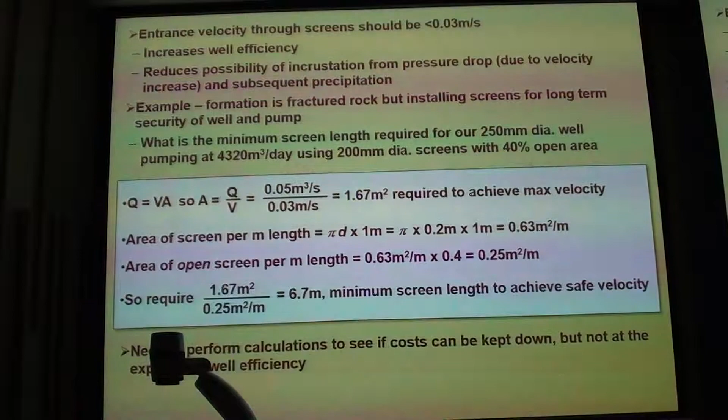Okay, you can check the slot widths. They'll have a specification that goes with them, same as the pipe did before. And you look at the assembly of the thing as well, and you actually watch them put all this together to make sure that it's all done properly, and they don't just show you the bits and then replace them with cheaper nasty bits later on.

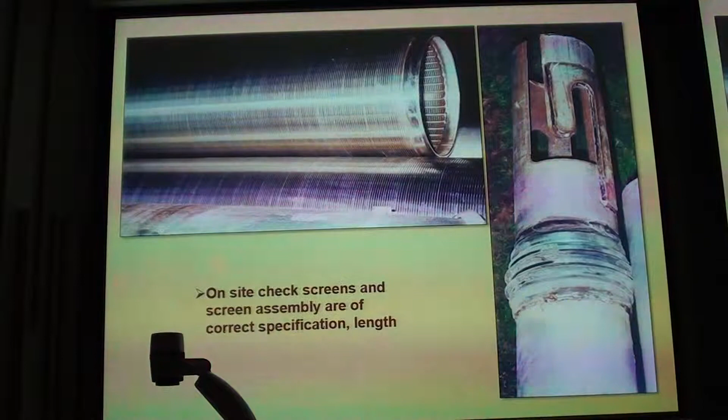You'll do lots of site checks during this part of the investigation. You'll be on site quite a bit. You know, check that things are going along with those that you've stipulated in the contract. Take a shot of that. Okay, construct the well.

Right, we've told them what size casing we want, we've told them what size screens we want, we've given them lengths, we've given them instructions on how to construct it. The pipe will be welded together with fully penetrating welds, full circumference, normally 3 passes, etc. And so now give them the design, and they get materials, and they start. In fact, a lot of the time they'll have materials already because they'll have preempted the fact that this is going to happen. If not, then they'll use them on another job later on.

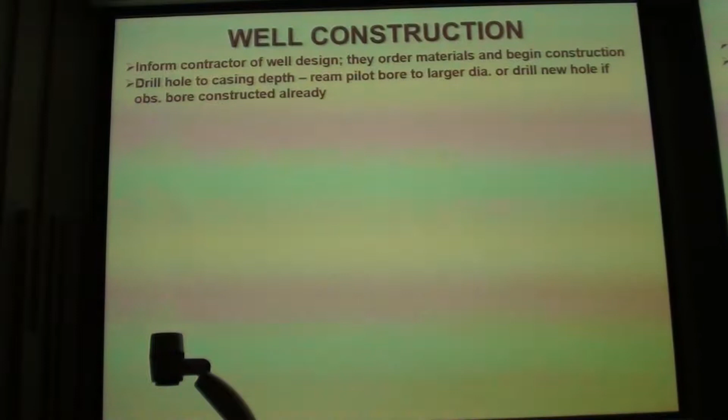So you drill a big hole this time, down to the depth of where you want to put your casing. This time you won't core it, it'll just be a big roller bit, a 300mm diameter roller bit, on the end of a very large drill rig that'll just pummel its way down into the ground, hopefully pretty quickly, and just cleaning up material as you go. You don't need to look at the material that comes out, you already know what's there, you've already drilled the pilot bore. This is just making a big hole straight down into the ground.

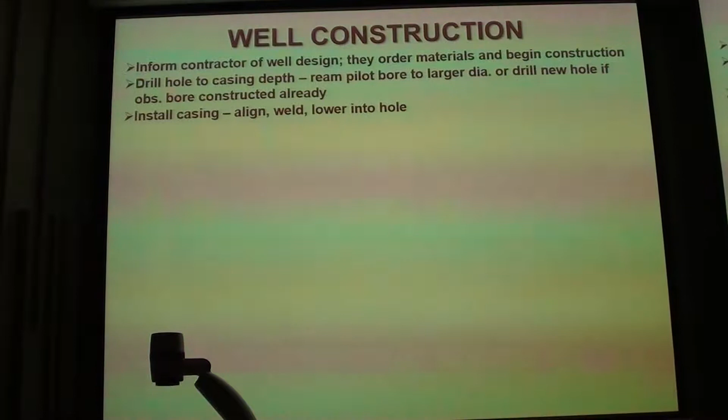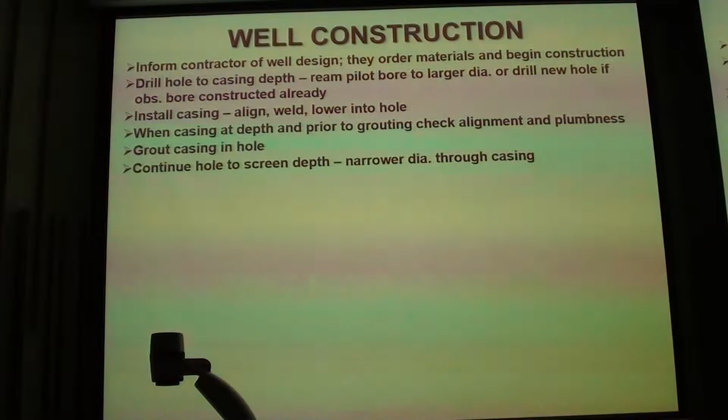You'll install the casing, align it, weld it together, lower it into the hole to the right depth. Check its alignment and its plumbness, make sure it's straight, make sure there's no kinks and bends in it, things that would stop the pump going down. Right, then you'll grout the thing in the hole, cement it in. Continue drilling through the casing, down to the depth you'll put the screens in. And there you put your screens down into the hole, finish everything off.

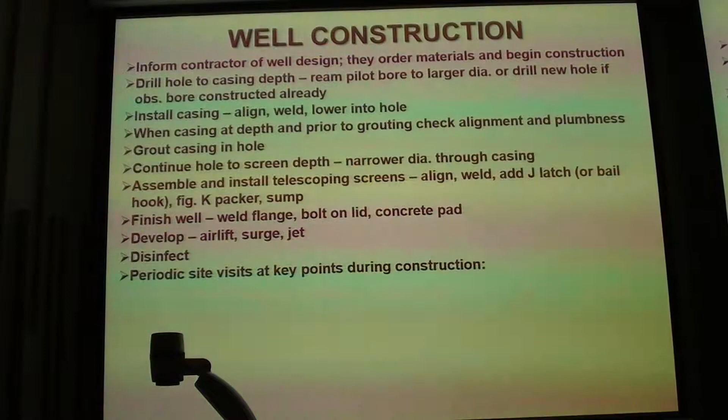Develop it, clean it all out, get all that filter cake off, all that nasty stuff that's been smeared against the aquifer while you've been drilling. You'll pump all that out, hopefully. Disinfect it, and then you'll just leave it until the next stage, which will be the pump testing. That's when a different contractor comes along and puts things in the hole and extracts water through varying means. It gives you data which you then analyse.

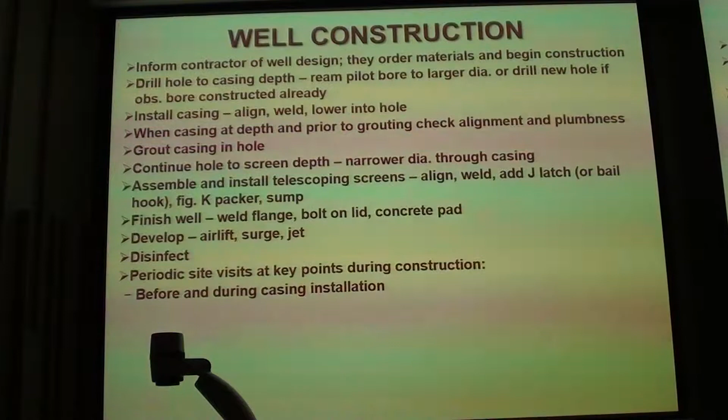But you need to, like I say, visit the site a lot during this particular process. I talked about that in the contract, so there are stop points and hold points and all sorts of other things. Before and during the casing installation, you want to check the casing, but you also want to make sure they're putting it in properly. You want to do things like check the welds, check that they're aligning it correctly, etc. Check it conforms to specification as well.

You also want to observe them grouting it in to make sure they are doing it properly, and the grout fully returns to the surface, so you've got maximum protection between the casing and the ground, and also maximum strength keeping your well open as well. Before and during the screens going in, you'll need to be there as well to make sure everything's all good, and you'll check welds, etc. for that as well. Okay, so there's a lot of practical stuff that goes on here as well, which you have to be present for.

Now, it can be a real pain in the butt. There's one bloody case we had with the drillers. They ordered their casing right on site, and it hadn't been beveled. The manufacturer hadn't beveled the ends of the casing, which I'll talk about in a minute. And so we're already flying down to New Plymouth to go and check on the casing and the installation, because they were going to build the well on the site so we could see it.

And you get phone calls at 8 in the morning saying, oh, it's not going to happen. So you go, fair enough. So you cancel all your bookings and your flights. And then they said, oh, it'll be a couple of days. And then 4 o'clock in the afternoon, they said, we're ready to go. And you go, then, yeah.

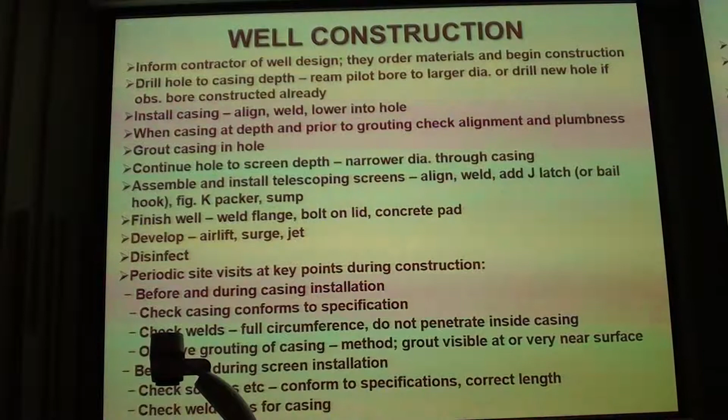And so then you've got to rebook your flights and your accommodation and get to the airport and get down to New Plymouth before everything closes and try and find McDonald's and hop in a rental car and race out to the site which you've never been to before. It's 8 o'clock at night and it's pissing with rain, pitch black in the middle of winter. It's great fun. Everything that can possibly go wrong will go wrong on at least one job. And this was one of the ones that went wrong. They did the job really well, but you've got to give this a little time. Yeah, it's good fun. Just be prepared for those kinds of things.

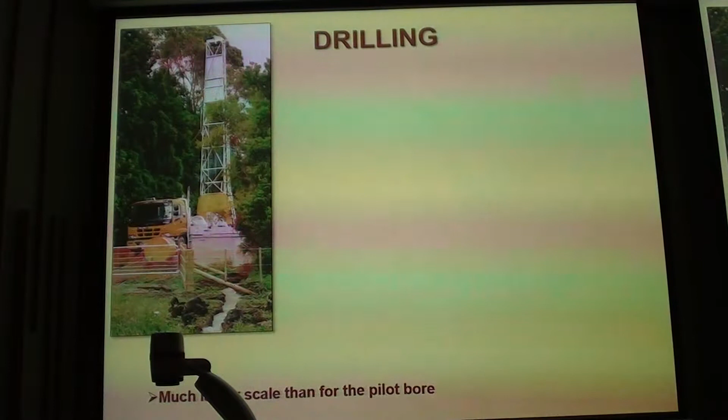Okay, so the drill rig, much bigger than you were using previously. The last one, I think, had about 2-3 metre lengths, so they get about 6 metres of rods above the ground. These things here are like 12 to 18, 20 metres high. They're big trucks, lots of grunt, very noisy, big smelly old diesel things. But they're the ones that you use for putting the big holes into the ground. You can see there's the driller, and there's the length of rods that they're using. All the heavy gear. The heaviness is great because it keeps everything vertical, going straight down into the ground. But you need a lot of power to turn it, a lot of grunt in these things.

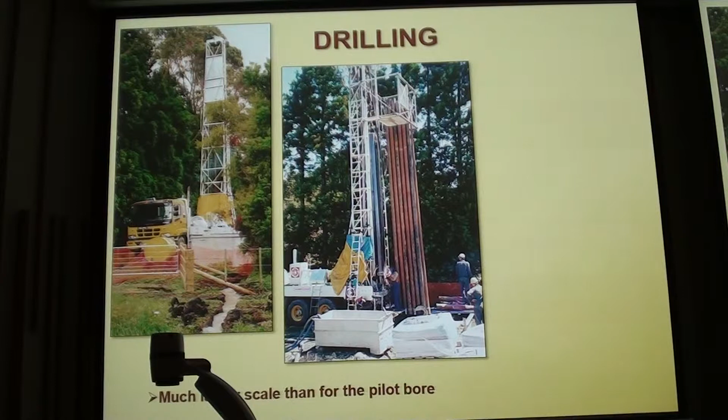Everything when you're building wells is bigger. The mud pits are huge, so everything's big. And it's more than a two-person operation. When drilling the pilot bores, 2 people is enough to run everything. Here you've got 3 or 4. So someone's standing up here feeding the pipe across, you've got the driller and the other workers down the bottom with all the tools and everything grunting away. But it usually goes pretty quick, because these things are pretty grunty. It's all good.

Big mud pits. Okay, don't go near those. They're really slippery. They use really, really slippery stuff. A lot of it nowadays is polymers. It's all man-made, and it's really slippery stuff. You don't have to get much on the bottom of your boots to go for a skate. You don't want to go near those.

All various things here. They'll mix the grout in these things before they pour it down the hole to cement the casing, and some bags of cement, all sorts of things over the place. But again, it should be a tidy workplace. Everything should be contained within boundaries. It should all be fenced off, in fact, for safety. Public aren't allowed to just wander in and have a look around. All those sorts of things that OSH necessitates nowadays.

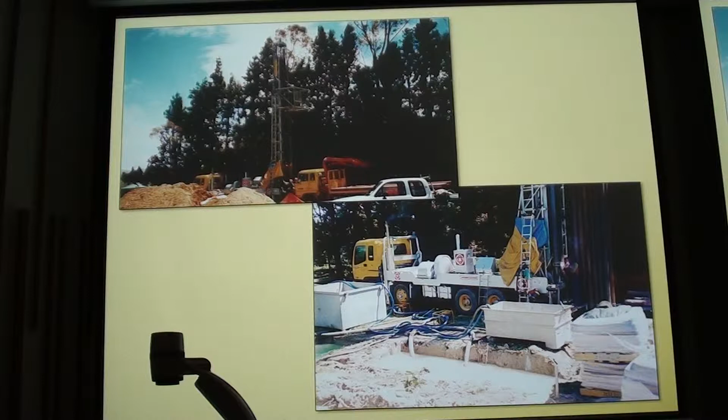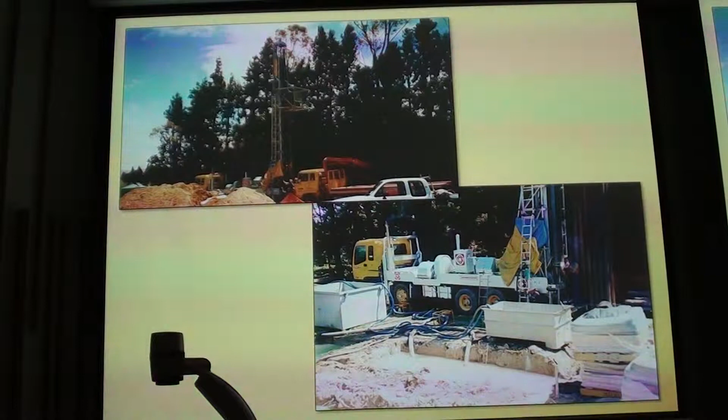You have to wear bloody hard hats and vests and things. Hard hats are actually a waste of time. The only thing they're good for is to stop you banging your head on things. Otherwise, they're not really that useful for much. Anything going a reasonable velocity or a reasonable weight will go through it to crank your head anyway. But you have to wear them.

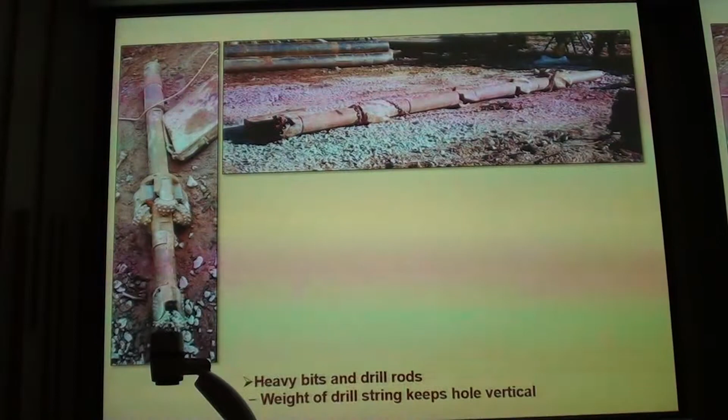So all the gear's big here as well. Big long drill rods, big bits, all the reamers and openers and things at the back. Heavy bits. So you need all that, because A, you've got big diameter holes, and B, they've got to be vertical. They've got to be plumb.

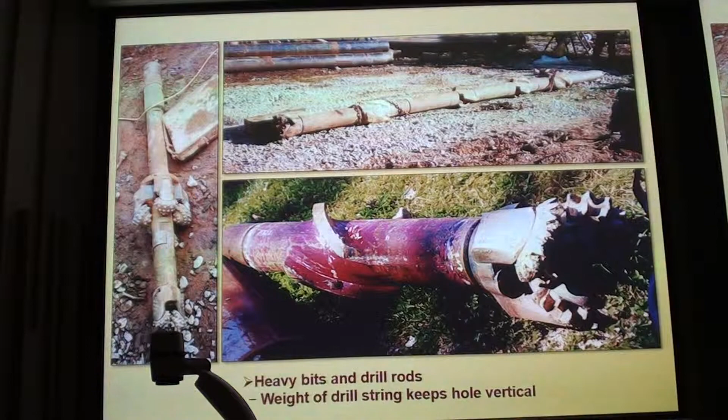As the weight on the drill string keeps that happening, by the time you get down to about 200 metres with all this gear hanging on the end, the drill rig is holding up several tonnes of steel as it goes down into the hole.

So it's why it's so big and grunty, but it's doing its job by keeping everything nice and straight. They should weld, and you've got to align the casing. The casing has to fit together perfectly, edge to edge with no overlap on the inside, so that when you put things down the inside, like the screens and the pump, it doesn't get caught up in the casing, which would be an absolute disaster. So they should weld little alignment tabs onto one end of each piece of casing.

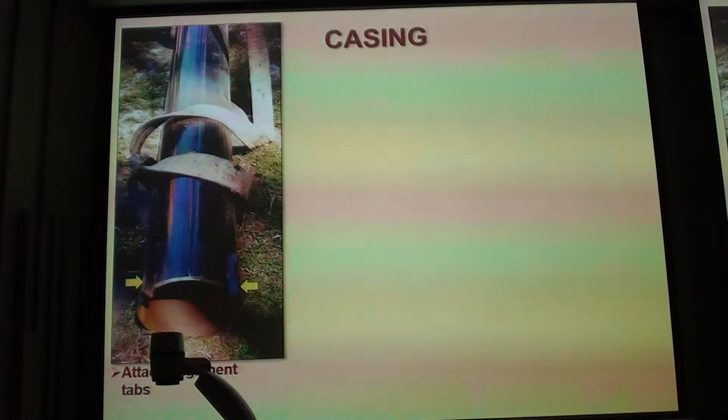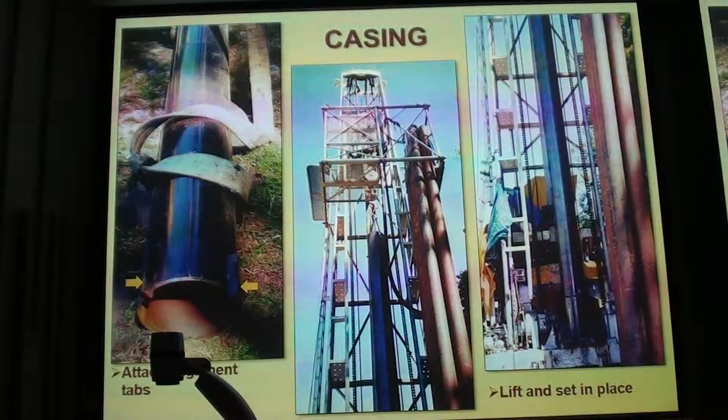Then they'll lift the casing down and set one piece on top of the other. The alignment tabs on the piece they're setting down will fit perfectly over the piece of casing that they're holding up here in the hole in the grips. Then it's just a simple matter of welding it all together.

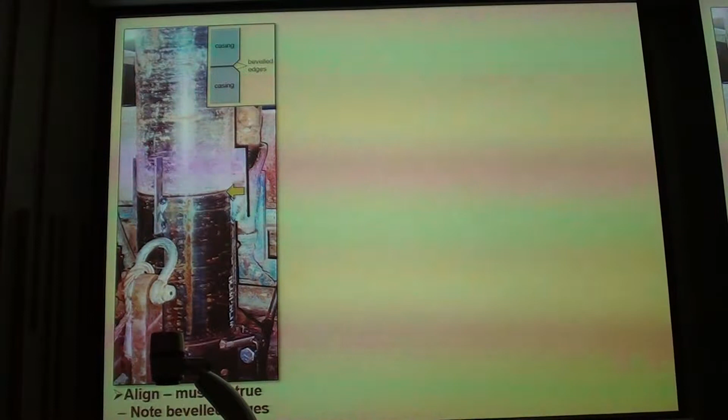When they sit the casing together, see these beveled edges here, they leave a nice recess all the way around. When they've finished welding it up, that should be nicely filled all the way around, so you don't get any leakage, nothing can get in, nothing can get out. The welds must not penetrate inside for the same reason as the casing can't overlap. It's a very simple process, and they'll be very experienced at doing it, but you've still got to check that they're doing it properly. It's very important.

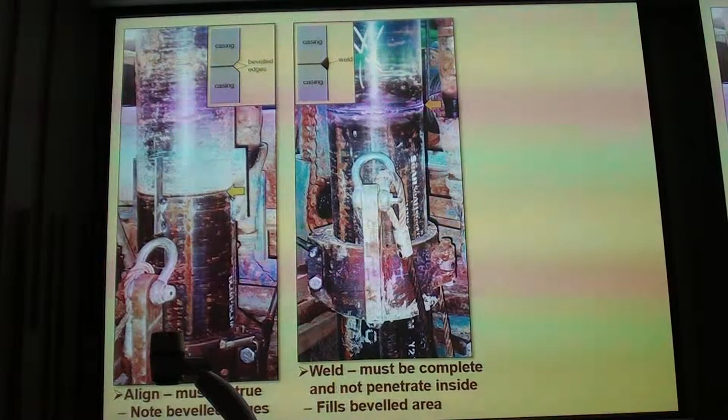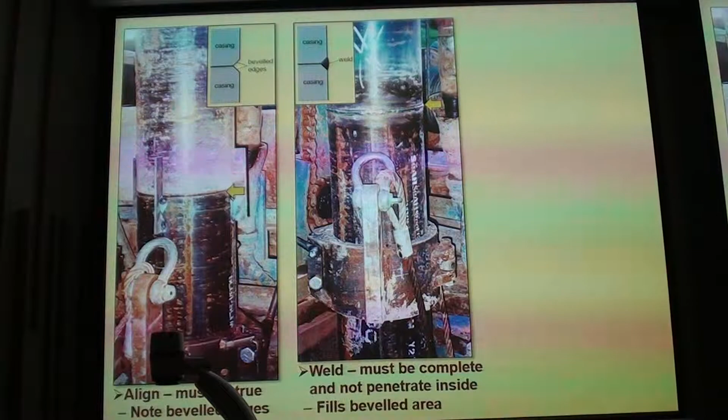Then they lower this one down, knock the tabs off—they just come off with a hammer—lower the next one down, put another one on top, and it's just a process. It actually happens reasonably quickly when you've got an experienced team that knows what they're doing.

Once your casing's sitting on the bottom of the hole, they'll weld a flange onto it there, which you can bolt a cover onto, or do whatever you want to keep the well safe later on. But you'll notice between the casing and the edge of the hole is quite a sizable annulus.

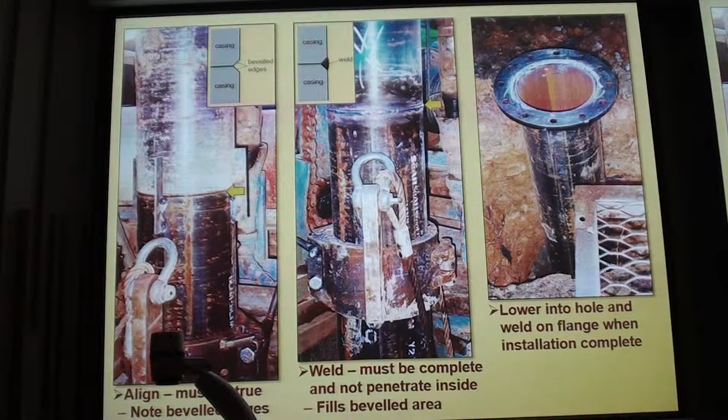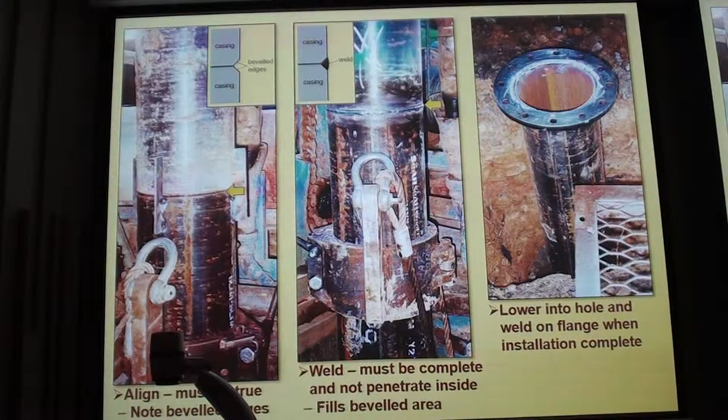They've got to test the plumbness and alignment of the casing to make sure that you can get a pump down there, and get screens down there and in and out.

So they'll make up some sort of dolly, which it depends how they do it, but if you're doing a solid one like this, it's got to be half the length of a casing piece, so it can slide through quite easily. It should go all the way from the top of the hole to the bottom without interference, which means your well is nice and unobstructed.

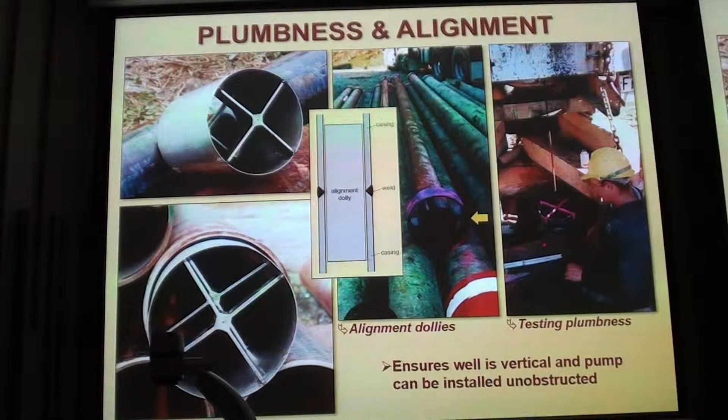What they'll also do is an alignment test as they lower this down, with a little device sitting over the top here, and the cable rests against it. If at any time the well deviates from vertical, the cable will move against here, and you can note that. If it gets excessive, they may have to do something about it. Basically, as long as their dolly goes from the top to the bottom of the well, it should be pretty safe.

It does help if the well is vertical and not tilted at any angle, because when you put a pump down, you want it to hang in the well at depth rather than sliding against the side. So plumbness is very important, as is alignment. They should test that, and again that will be written into the contract—they'll have to give you the methodology as to how they're going to do it, but it'll be written in there.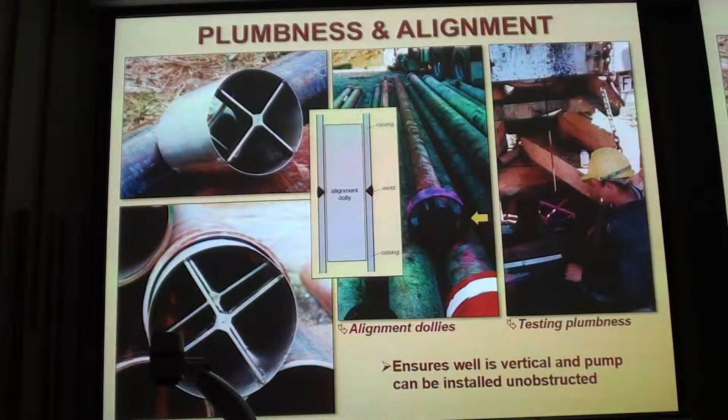Right, grouting the casing in.

They mix the grout on site sometimes. It depends if the site's easy to get to and it's normal work hours—they may actually just chuck in concrete already mixed, already pre-mixed.

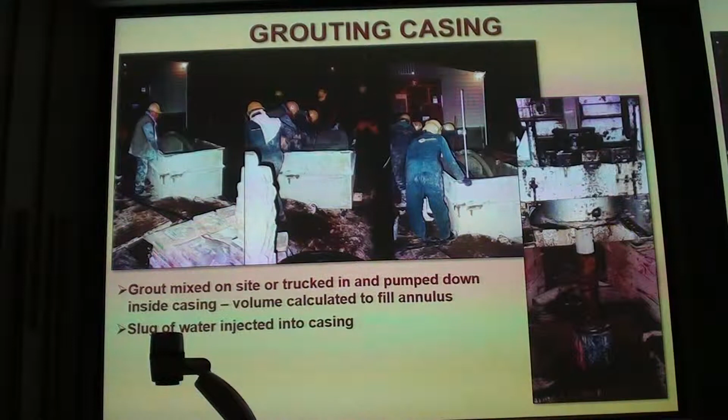Often they'll mix the grout on site. They've calculated the approximate volume they need, they know all about this, the consistency, and what the final grout needs to be like. So they'll mix it on site, with the casing sitting here on the bottom.

They pump the grout down to the bottom of the casing, so the inside of the casing is the grout. That sounds weird, but that's how you do it. Then they chuck water on top and seal it up, then pressurise the water. The water pushes downwards and pushes the grout up and around, up the outside of the casing, and it should come somewhere near the surface by the time they finish.

That's one thing you have to make sure of as well. They can finish the rest off when they do the well head later on. Basically they lift the casing off the bottom, pressurise into part of the casing, and the water pushes the grout down and up the sides, isolating it from the ground if everything's done properly. So you've got a nice annulus around your casing.

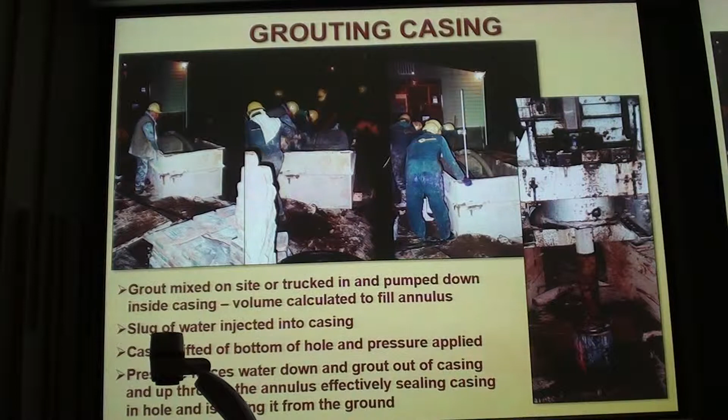Then the screens go in. You've looked at the screens, so you can see we're putting an awful lot of screen into this well. This is the vast amount, this was down on the same Taranaki job as well. This is daylight we've got.

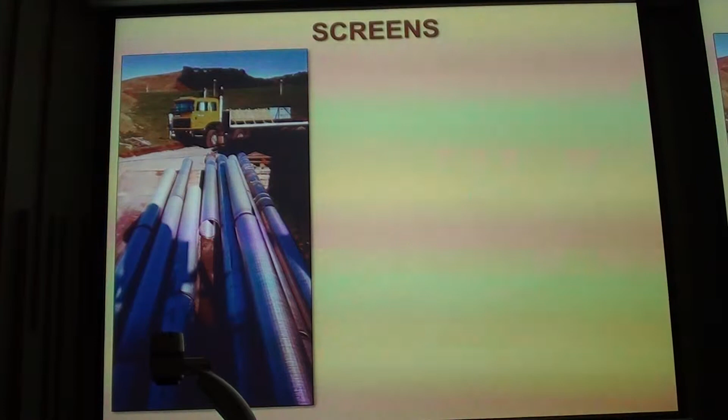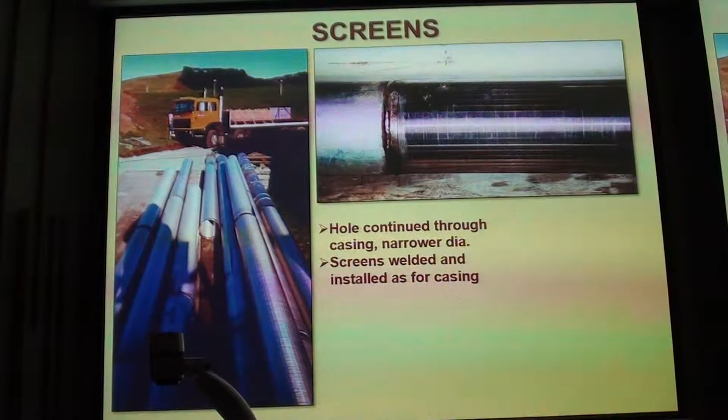Basically you then drill through the middle of your casing, so you lower the drill string down through your casing at a narrow diameter, carry the hole down to the depth you want, weld your screens together, and install various assemblies on it.

You've got this J-latch, which is how they lift the thing up and down. The crossbar goes down, hooks into that, and pulls up and down. You've got this rubber packer here, which will seal the screens against the inside of the casing down at the bottom of the casing, keeping everything integral as we had before.

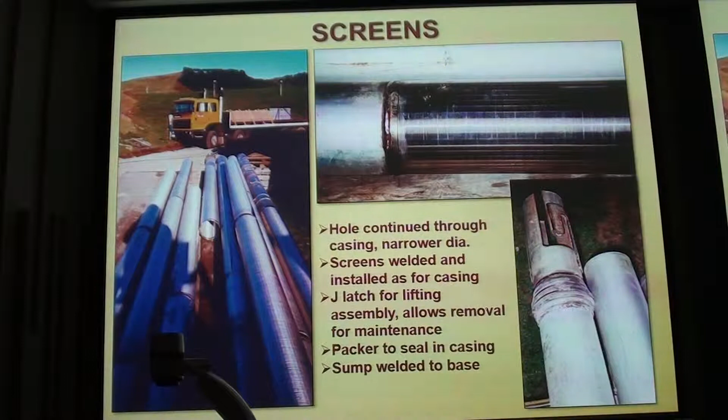And you'll get a sump. They'll weld a sump on at the base, a 1 or 2 metre long hollow tube that will catch anything that falls into the well, hopefully, so it doesn't get up through the pump, and it'll also support the well on the bottom, along with your J-latch and your packer.

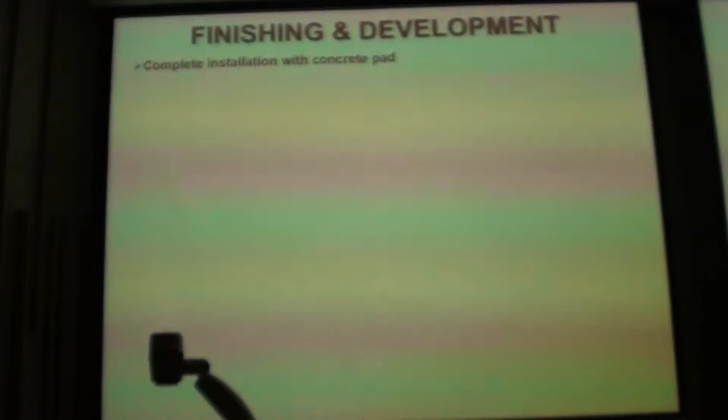Then they'll just finish it off. They'll top up the concrete if they need to, top up the grout, and make a nice concrete pad on the surface, keeping everything nice and tidy.

The well will be developed. Remember for the previous one, the pilot bore, we had to airlift it, pulling water from the aquifer in through the sides to clean out material that had been smeared against the side of the well as you drill, removing the filter cake. You need that - it makes your well more efficient, increases productivity, and also cleans the fines out of the well, so you develop it.

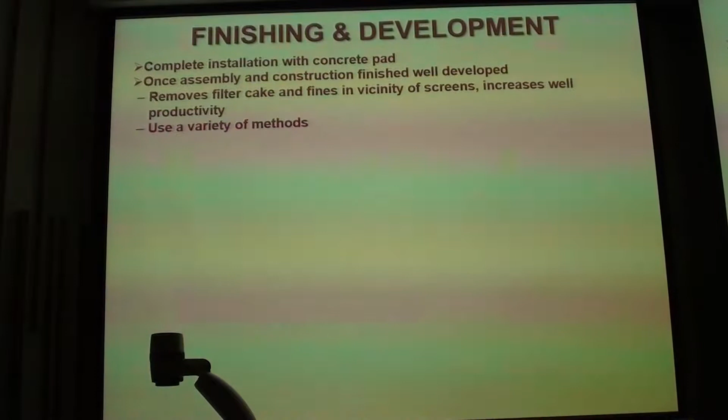You can airlift it, but more commonly in these big wells you'll jet it - you load one of these things down, and high pressure water jets out these holes, gradually moving it up and down through the screens and spinning it around, so the water jets through the screens, hits the aquifer, and loosens all this material, washing the aquifer. They'll airlift at the same time and suck all that nasty water out.

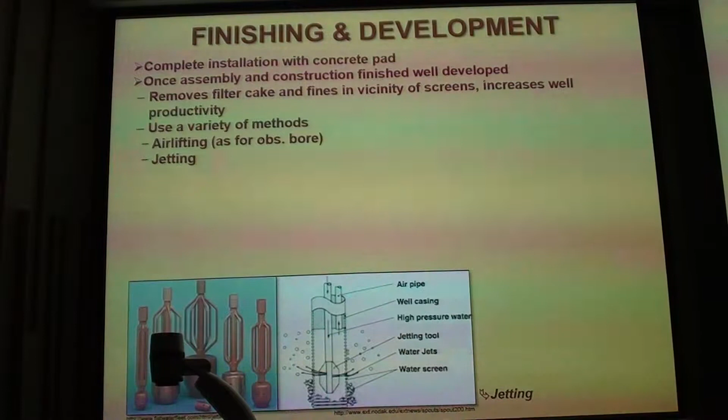Sometimes they'll surge it, putting a surge block down. This thing's almost like a plunger, like a sink plunger again, except down inside the well. They'll move it up and down, forcing water into and out of the aquifer, again having the effect of cleaning it out, and then you suck all the dirty water out through airlifting as well.

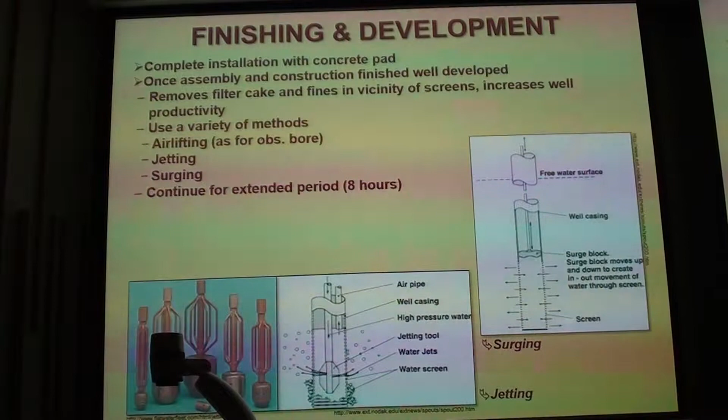It needs to be done for a long period of time. Remember the original one took a couple of hours until the water's really clear - this one here, you need to do it until the water is clear, with no sediment in it, or only very, very tiny amounts of whatever the stipulated allowable amount is, but it's usually virtually nothing.

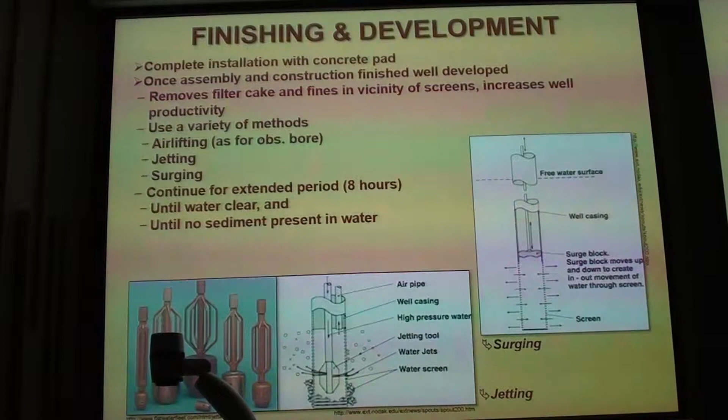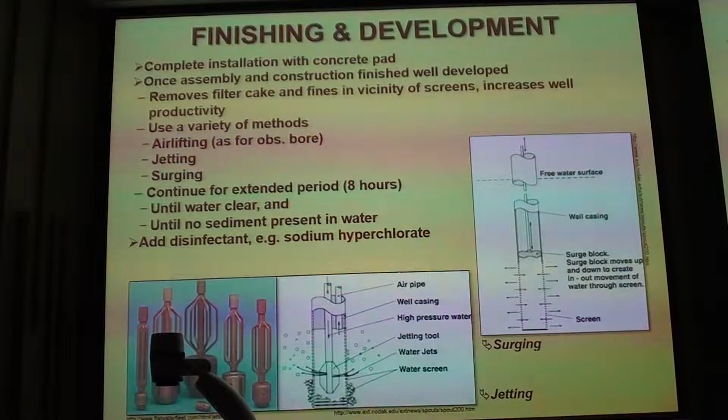Once that's happened, you generally just shut everything down and chuck in some disinfectant, because nothing's going to happen to the well for a while. You're going to get pumping contractors in and all sorts to do things, then bolt on a cover and just go away.

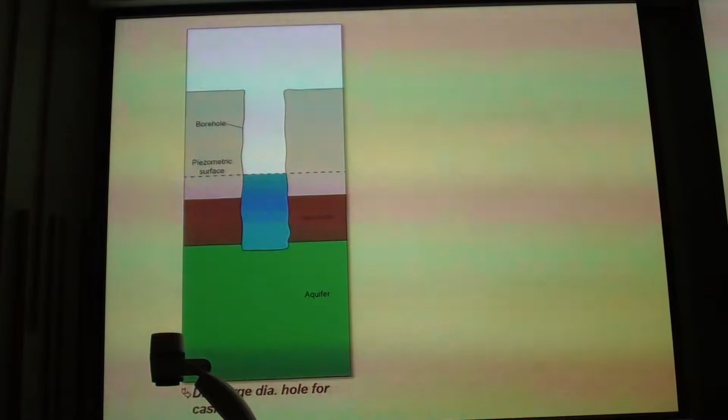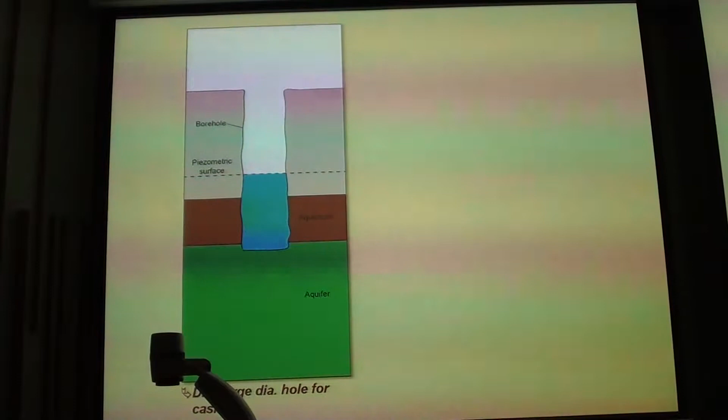Right, so here's the process graphically. You've drilled your hole, so it's uneven sides. Here's your water table, here's the aquifer you're trying to tap into, here's the aquiclude, the aquitard above it, and all the stuff you want to case off. So basically your casing is going to completely fill this part of the hole. You want to isolate all of that from your aquifer.

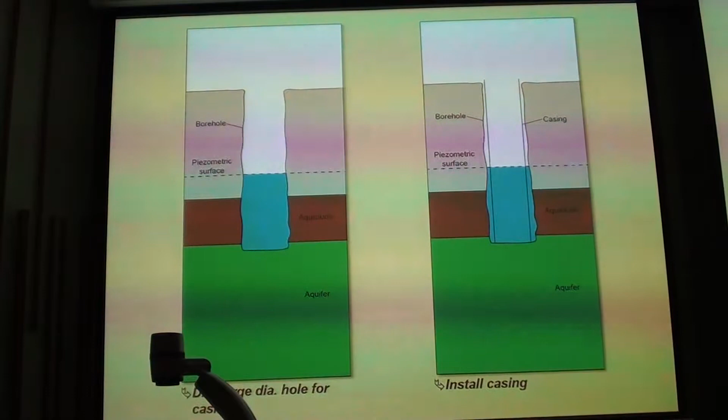You don't want anything getting into your aquifer down below there. So you put your casing down, lower it to the bottom. Remember, it's been welded together and aligned properly. Seal it up. Pump in the grout with that stuff they're mixing. That's the cement pump at the bottom. Chuck a slug of water on top of it, and yes, it will sit on top quite nicely. It won't mix, this will be at the bottom.

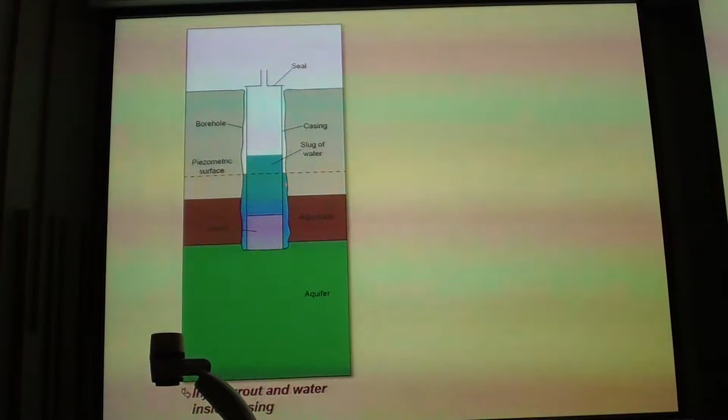Lift your casing a little bit off the bottom so that the grout can come up through here, and then pressurise this. The water gets pushed down, the grout gets pushed up the sides. Forms a nice seal here in the annulus, keeps your casing isolated. You've got a really good well. Done properly, you've got a well there that should last for a very, very long period of time.

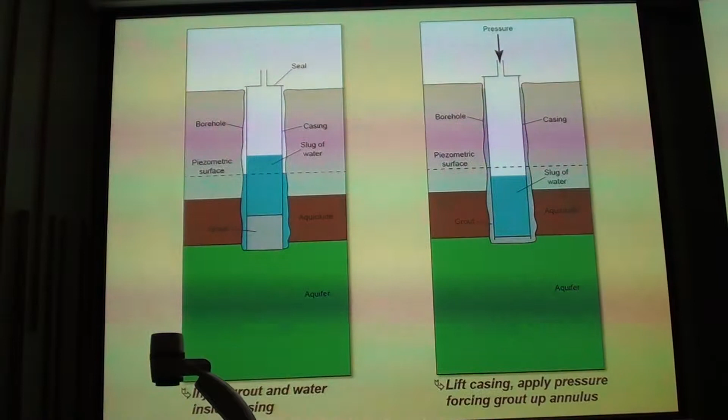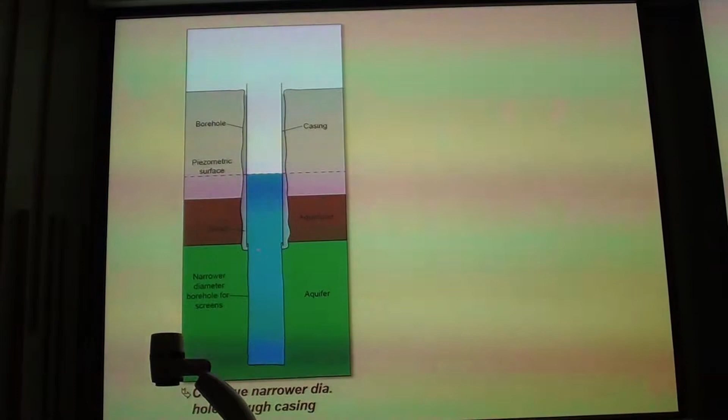Then you just continue drilling down through the well and narrow down. So remember, this was 250mm casing, and we've got 200mm screens, so you can get that down to the depth in the aquifer where you want to screen to, and lower your screens down, insert your screens. So that's the packer, it seals off everything against the side of the well. So this area of the aquifer is the only part that water will come through into your screens. Everything else is isolated, it's all good.

Sitting on its sump, there's the latch if they need to grab it out again. And complete your pad, chuck a lid on it, and the driller's job is then done. That part of the contract is fulfilled, everyone's happy, hopefully they can go home.

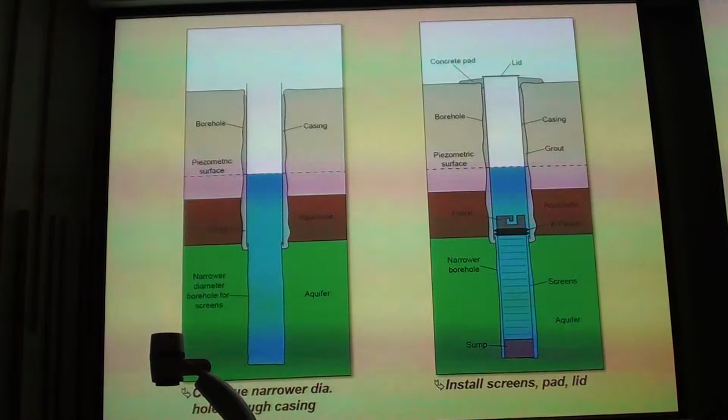So you can see why these things are really good. They're very unobtrusive, they take up very little space. Unlike a dam or whatever, you've got a bit of an outlay, but nowhere near the cost, nowhere near the environmental effects. Everything's all disappeared. Even when the whole project's finished, you'll only end up taking a very small area where you'll have your power supply to your pump and whatever. You really won't see much in a completed well. It's a very, very small thing.

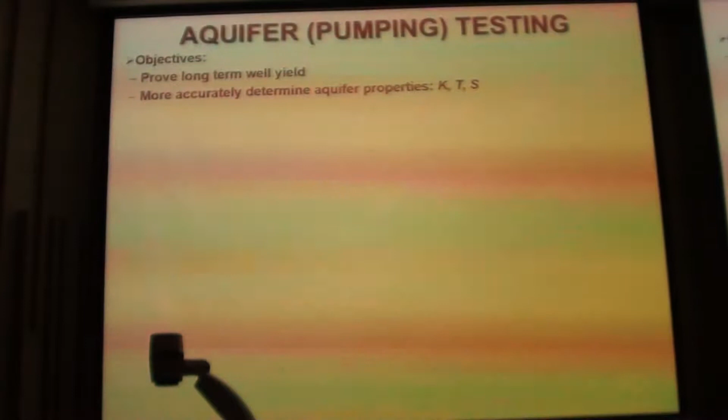Okay, once that's done, now you can test the thing. Aquifer testing, or pumping testing as it's more commonly referred to, is used to prove the long-term yield and accurately determine these so we can do our modelling. The contractor will be a different person probably than the driller. It's quite a specialty job, and they install a pump into the well, calibrate everything, making sure that the pump can cope with the yield that we want it to get. They've got all the details that we've got there. Their experience, they know what they're doing here.

You've got your pump well and observation bores. At the same time you've made the pump well, you've made more of those small bores like I talked about in the previous lecture, those obs bores or observation wells. You'll monitor those for a set period, generally about 24 hours before you start pumping, just to see if atmospheric pressure or whatever affects your aquifer to any degree. See rainfall, is that affecting it to any degree, or is everything nice and smooth? Because you can use this for correction later. So rainfall, atmospheric pressure are also recorded.

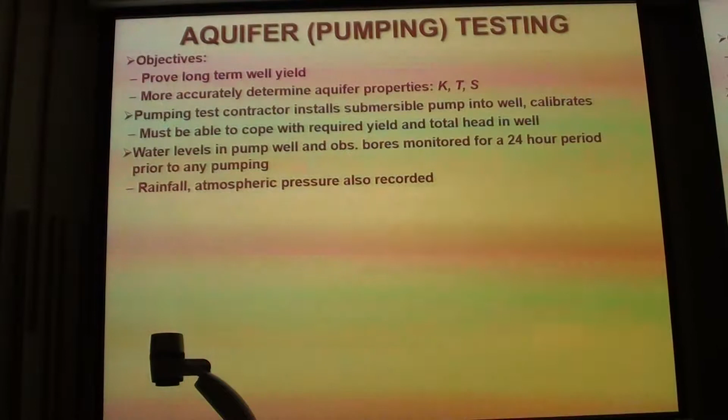You establish the static water levels within the well, so the piezometric surface within all these things are established. And then you conduct what's called a step test. You pump the well at increasing discharges for a set period of time, and from that you monitor water levels and graph that up. You can get some detail from that, an idea of how your well will behave, and at least whether it's going to be able to cope with the pumping rate you are asking the contractor to do. It's quite a useful thing to do, doesn't take very long, sort of a day. That's quite an important step. Then you'll conduct a constant discharge test.

You basically pump the well at a constant rate, hopefully the rate that you're hoping to achieve, for a long period of time, days, weeks if possible. The longer the better, because you'll see the effects over a longer period of time, stretching out further, and you'll get much better data.

You monitor all the water levels in all holes available to you. You monitor the draw down. When you start pumping, you'll do this over a very short time interval, maybe 30 seconds. As the pumping duration increases, you'll go down to minutes, and then maybe only every hour until the pump test finishes. At the end of the test you switch it off and measure the recovery, because hopefully the well will start recovering as the water level recovers in the aquifer, and you measure that as well.

Because you can use all this data from the step test, from the constant discharge test, and from the recovery test, you can use it all to quantify your aquifer, and the more the better. So you get really good ideas of K, T, and S, which are really, really important because, say, your groundwater model is based on those values.

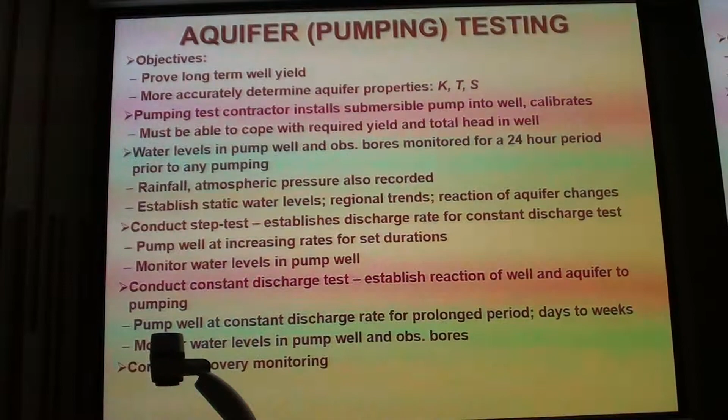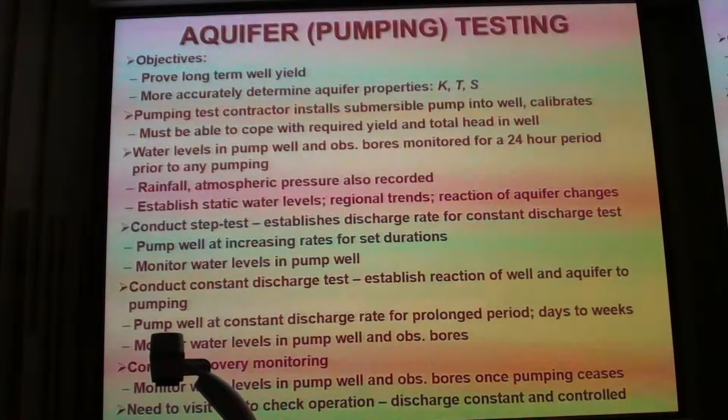You also visit the site during this particular period of operation, doing the pump testing. It's quite a different thing to what you've seen previously. There's no construction going on here. You actually don't see a lot at all, but you have to make sure you're doing it properly.

So in the well, they'll put a pump of some description, meeting the specification that you want. They'll put it reasonably deep down because, of course, when you start pumping, the water level drops, and once it reaches a certain level above the pump, it'll cut off. You don't want it to cut off. You want to keep pumping for a long, long time, hopefully ad infinitum.

The pumps are pretty boring looking things. Internally they've got a whole lot of rotors. More rotors if you want a greater pumping range, you just add more rotors. They're electric, so the power cable and everything comes out the top. They'll be connected to a riser, and there'll be a pressure gauge and various valves up the top.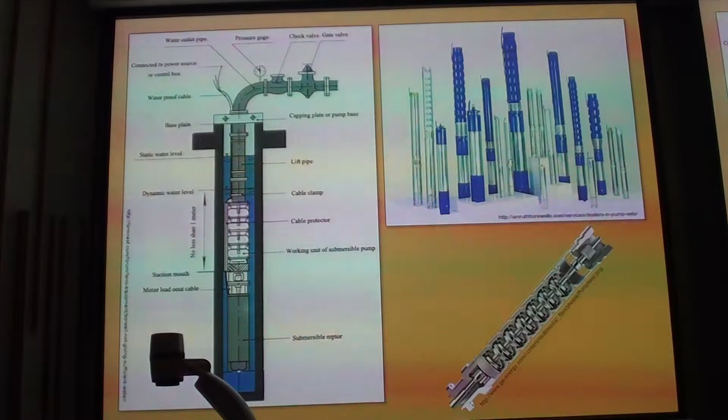Overall, you don't see a lot at the surface during a pump test. All the subsurface stuff is gone, it's all sealed off, and you're not seeing it anymore.

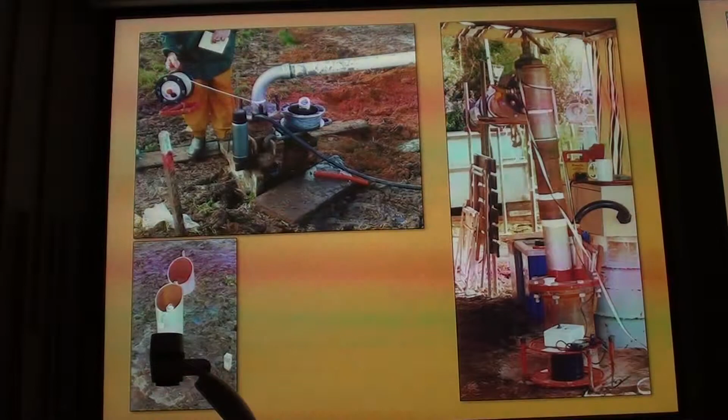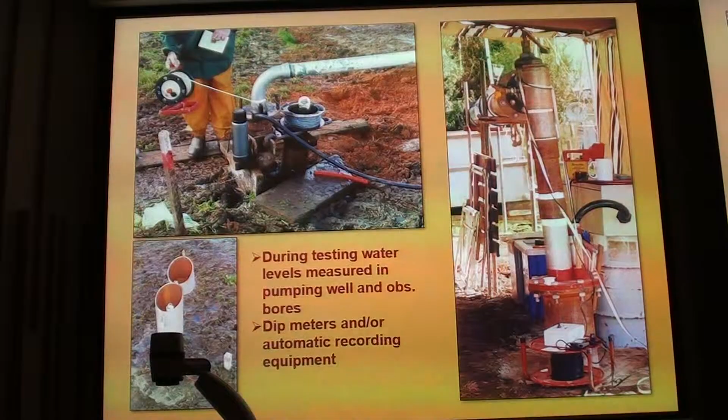During the pump test, you'll monitor water levels, both in the pump well and in any boreholes you have. You probably won't do it manually unless you've got three or four people on site who will do it for you. If you're working with a consultant, you'll have automatic equipment calibrated and situated in each well, constantly taking readings, and you know what time you start and stop things, so you know what data to use from your automatic recorders.

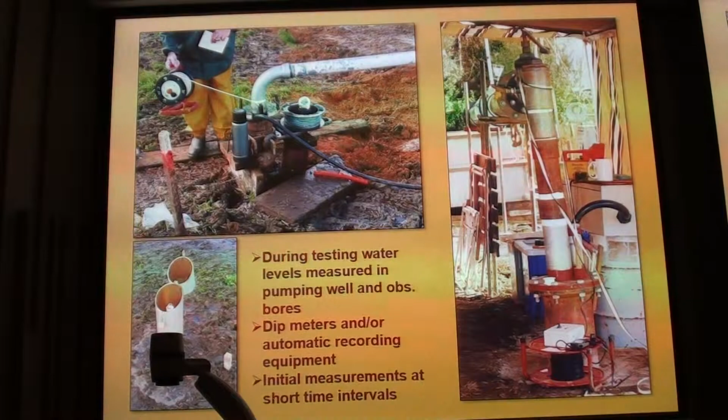Cones of drawdown: this is what pumping does to the groundwater level around a well in an aquifer. It makes quite dramatic changes to the groundwater regime, as you can understand. You're taking water out at a reasonable velocity.

The closer you get to the well, the higher those velocities are. The bigger, the faster the velocities, the greater velocities, greater head drop, lower water level.

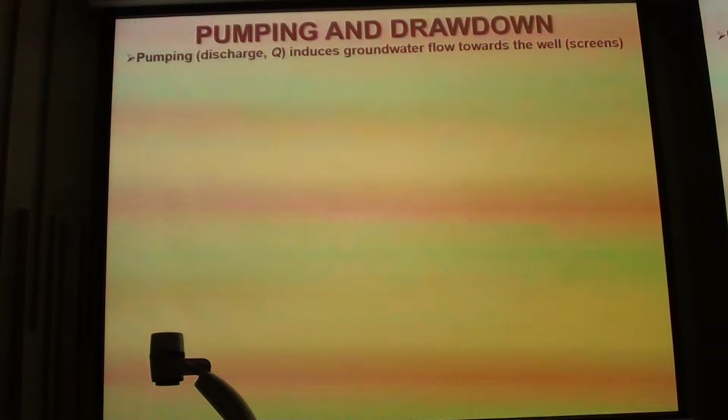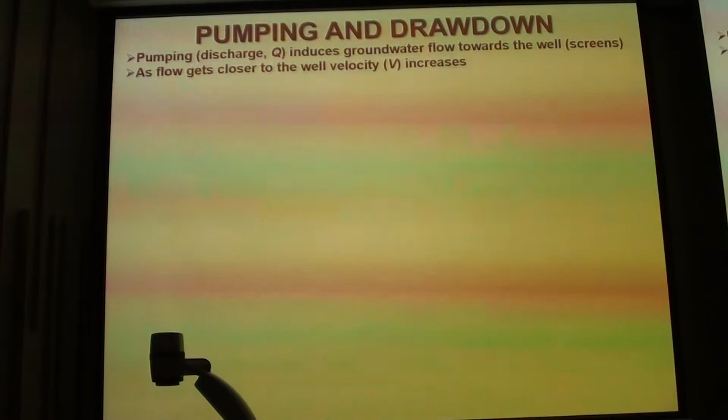So as the flow gets closer to the well, as soon as you turn the well on, you're taking water out of the ground, water starts flowing towards your well. That's the point, that's the place where the head is lowest. Remember, water flows from high head to low head. As it gets closer to the well, the velocity of the water increases—it has to, because here's your well, sucking water out of it.

The water far away passes through a much larger area, a much larger cylinder. As it gets closer, the cylindrical area the water has to pass through gets smaller and smaller. The same amount of water is going through—you pump at a constant rate, say 50 litres a second. So to start with, 50 litres a second has to go through this large surface area, and it goes quite slowly. Later, as it gets closer to the well, through a smaller surface area, it speeds up. When it gets to the well, it reaches its maximum velocity, so it's going quite fast.

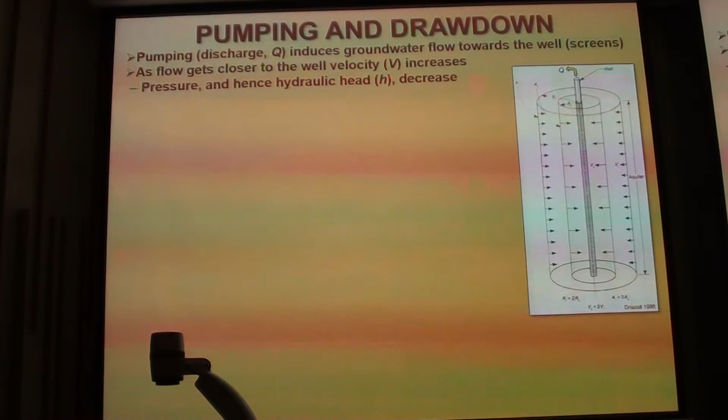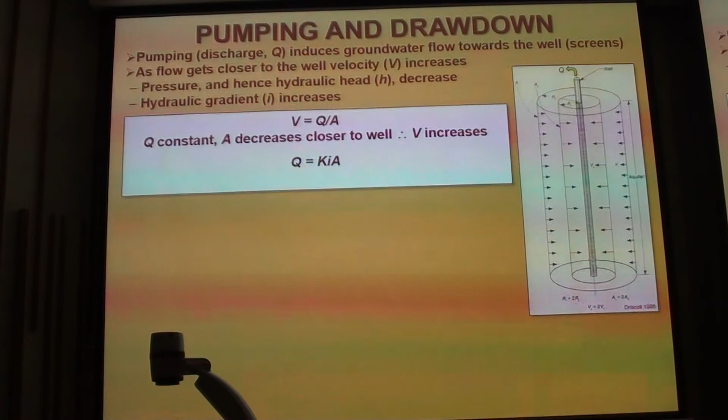Remember, pressure—and hence head, H—decreases as velocity increases, and hydraulic gradient also increases as that velocity increases, as the pressure decreases. So velocity equals discharge over area. Discharge is constant, so as you decrease the area getting closer to the well, the velocity has to increase. It's just simple maths—discharge, Darcy's law, Q equals KIA.